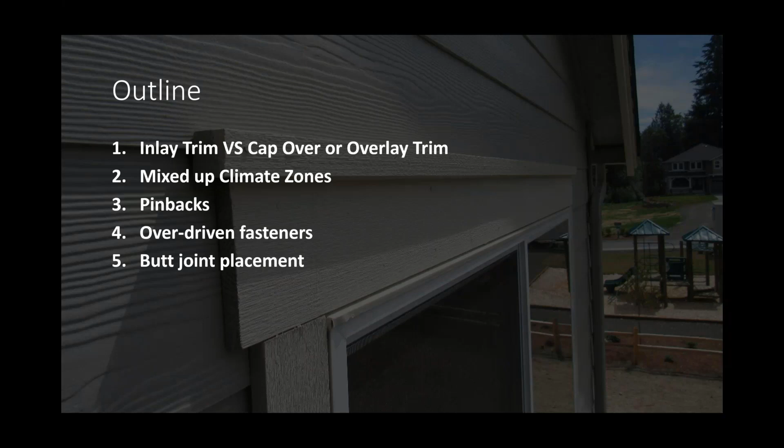Exactly, exactly, and we try to stay within the bounds of what our manufacturing, or what our product scope is, but as we all know, there's interrelated things between flashing and trim and the siding. Yep. So I'm a home inspector. I'm doing a new build here, and if I see Hardie trim done in that older cap over detail, that's flat out wrong, right? They should be doing this detail like we see here today.

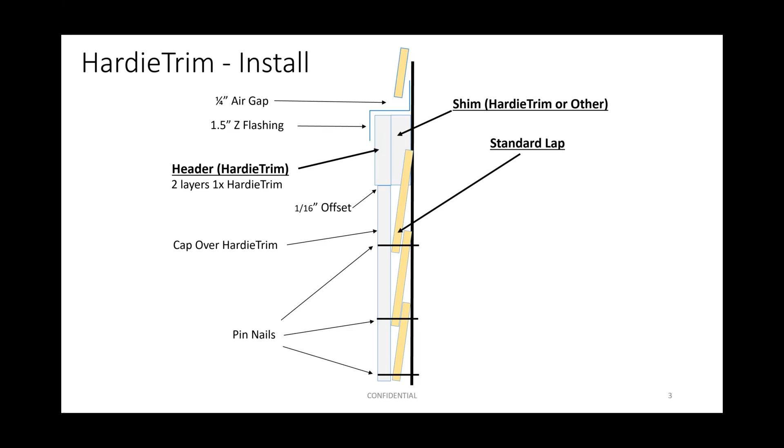Correct. Yeah. And I think the next slide that you have, the one where it kind of shows all three sides, there it is, is pretty telling of how it goes, right? So the header piece again is really a true inlaid butt-to application, and then all the other three sides of this window are cap over, traditionally what you'd find with wood. And so that would be the hybrid, right? We're doing an inlay header, and then the three sides are cap over.

Yep. I suppose an advantage of that is on the edges, you then have a better ability for the siding or the building to expand and contract and not buckle the siding because you could have more of a joint there. Correct. I think what you run into on this is the window manufacturer will call for backer rod and a larger caulking bead between the siding and the window frame, because vinyl windows or fiberglass windows will move more than, say, if you had cladding or Hardie trim or even wood trim there, probably.

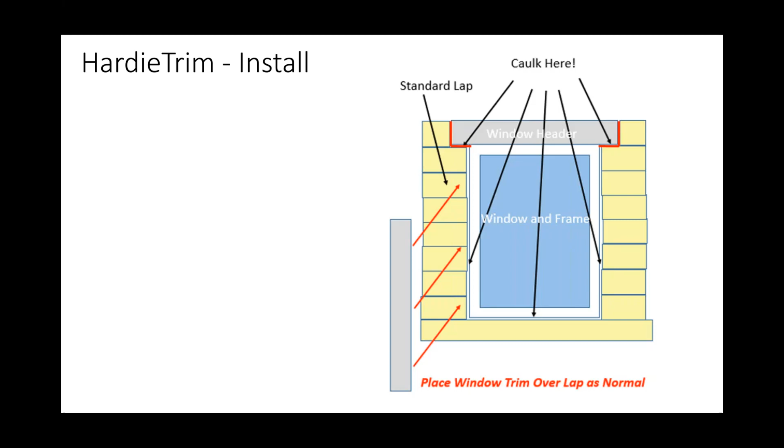Yeah, interesting. Let's go on to your next. So here you can see they've got kind of a mock-up. Now, did you guys test this at Hardie to know that this detail works? Yeah, we absolutely did. We played around with a whole bunch of different options on the back piece of the shim, but what we found was we could use an extra piece, basically what we call fall off, or a waste piece of Hardie as a shim behind the actual header piece, and then that creates that thicker butt-to trim application.

Yeah, that thicker trim. Now from a manufacturing standpoint, this is our thinner product. This is our 4/4 product, and the butt-to application or inlay application typically uses a 5/4 piece of trim. So if you're an installer, you could choose this thinner product and double it up, or you could use the thicker product for the headers and the thinner product for the trimmers.

No, not really. So what we found was the cap over 4/4, like the sides and the bottom, on top of lap is around an inch and a quarter, it fluctuates, right? But it's right about an inch and a quarter thick, and two 4/4, which is 3/4 to us, is an inch and a half. So you do have an offset on that header piece that sticks out a little bit farther than the three sides.

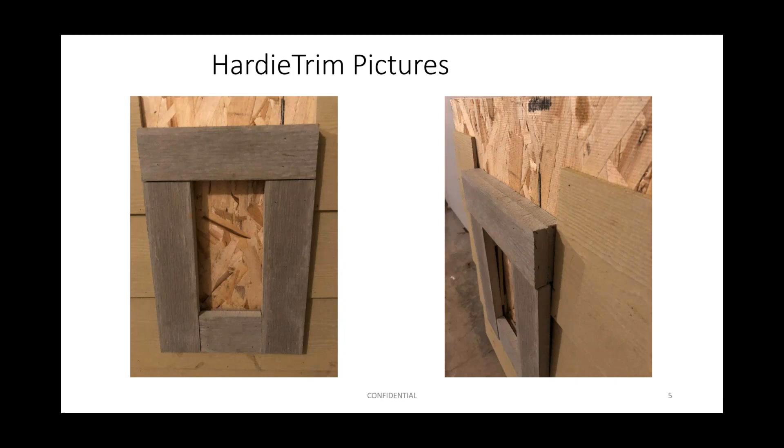So cool. Well, that's interesting. So this is now the detail we should be seeing, and I did include here, and we'll try to post a blog with this, but I do have the code for the flashing, so I think we're all on the same page that that detail doesn't really meet code.

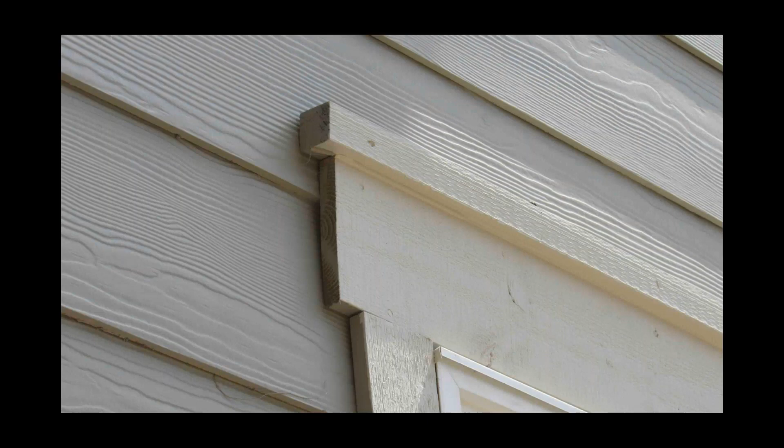And this is a picture from a house that was built, I bet, less than a year ago. So it is sort of interesting to me that builders are building trim details that don't really meet code. But yeah, it's always interesting to me that they actually pass the inspection for the permit. Yeah, that's just a bad detail. It really is.

Water collection system. It is. I mean, you might as well put some fern seeds in there, so you get some ferns growing out of it. It's just a crazy detail. But anyway, I've had a bunch of fights with builders over that in the last couple of years. So I'm really glad to see Hardie at least addressing it within the realm that you can, which is your own products. I appreciate it's hard to pick fights about wood products and things that aren't yours.

Where'd they get that white flashing? Yeah, on the lower part of the window. I don't know. This was one of the big builders. So, yeah, and we talked about this with the warranty, but the Hardie warranty is just for the product itself, so they don't care about the wood trim so much. Still might advise on what best practices are.

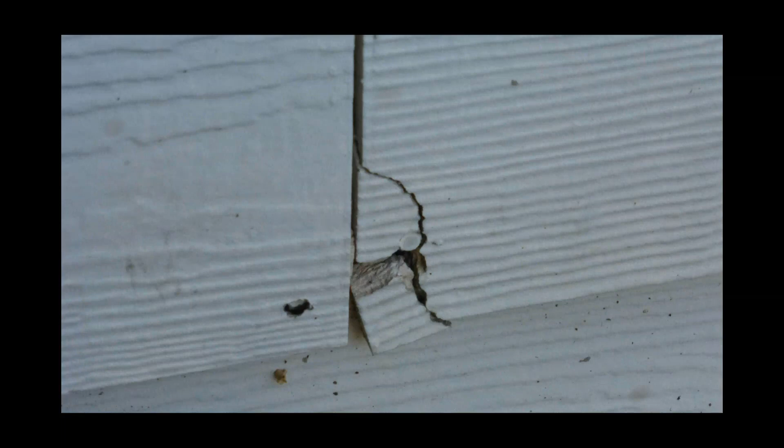So cool. Pinbacks here. Why don't you tell us a little bit about pinbacks, because this is a common thing that comes up a lot. I, for one, saw it over the years. If you get a home inspection call and it's a 2004 build, my question isn't whether I'll find a cracked corner. It's how many cracked corners I will find. And so I was always under the impression that the pin nail was a better pin back detail at the butt joint than the full head nail. But you've got some good info on this, Troy. Why don't you tell us about it?

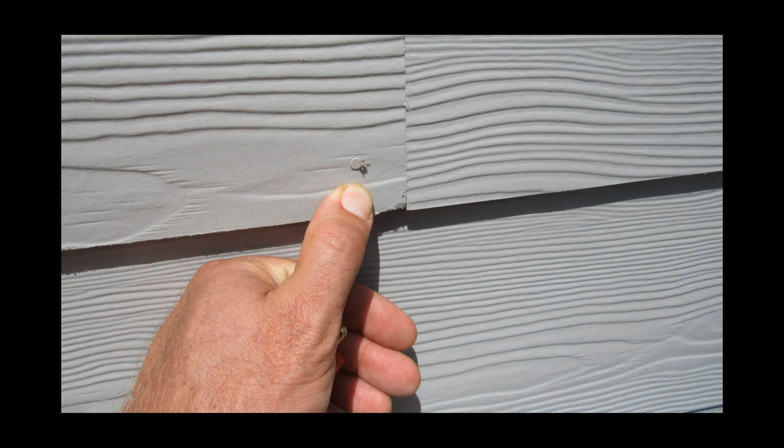Yeah. So the pinbacks are a better detail on that. The way Hardie reads pinbacks at butt joints is aesthetics only. So the only reason an installer, a builder, a contractor would pin it back would be for aesthetics. Like they see that course at that butt joint, one plank is kind of popped up a little bit, and it's following the framing, right? It's not really an issue with the water envelope.

But what we encourage is a finish nail, 15 to 18 gauge finish nail, like what you see here on this slide, to pin it back. And the reason why we like a finish nail is because as the house moves, expands, and contracts through the seasons, it will pull through the siding, and it kind of moves back and forth in that siding until eventually it pulls through, and then it just sits there.

So that's what we prefer, because our product is dimensionally stable. It's not really going to move. It doesn't expand and contract like wood in the heat or in the cold. So it will stay fairly stable. And as the house moves, the wood behind it will push it forward and out.

Now, Dylan, you brought up a good point with the headed nails from 2004. Our guidance used to be, yes, you can use a headed nail as long as it was off stud. At minimum, you have to be 3/4 of an inch from the end of the plank, and up an inch from the bottom. So you're not hitting a stud, basically.

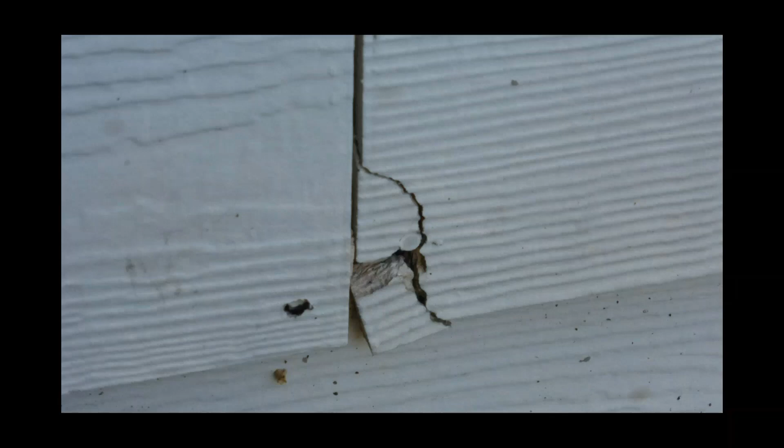What would be the forces that would make it want to pull through? The house moving, and the siding not moving at the same rate, right? We say a house basically breathes. It breathes with the seasons, so it expands sometimes in the heat, but typically it expands mostly when it's moist outside and moisture gets into the wood, and then it moves everything, and the siding stays fairly stable, and then it breaks, it cracks.

This is actually a pretty cool picture because you can almost see the nail and the caulking all held together, and it's like the other side of the board got pulled away. Yeah, that is a really good picture because if you look on the left side of that line, you can see where the head was imprinting.

Onto the piece that's on the plank, and then the broken piece is where it stuck to. Yeah. That seems like an exceptional amount of movement, though, for as dimensionally stable as Hardie is. Well, Hardie's not moving; it's the building moving, right? Yep. The OSB and the wood framing and stuff. Yeah, we expect that our product in a 12-foot board will move less than an eighth inch for the entire board of a 12. And that's still quite a bit, but in this picture, that's 3/4 of an inch. So it's an eighth of an inch and 3/4 of an inch right there. Hmm.

Interesting. Cool. Well, pinbacks. So to summarize pinbacks, basically this detail's okay. You can have a full head nail as long as it's not into the stud, at least 3/4 of an inch off the butt joint. So you can have a full head for a pinback, but the little pins are also an appropriate pinback, almost a preferred pinback, where butt joints might be flaring a little bit. Does that sound accurate? That is absolutely accurate. Cool. We'll keep moving here.

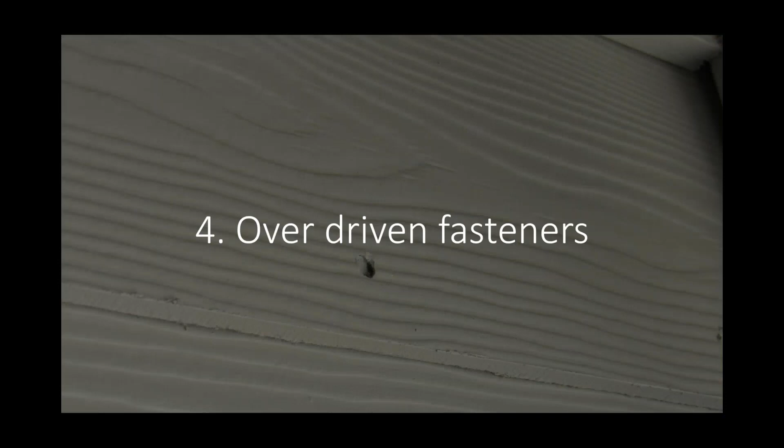It's pretty loose. You need a bigger claw hammer, Dylan. Yeah, that pry bar that I left in the car.

So there's a cool picture, an overdriven one right there. That's a great picture. But it's also too low, right? That's right. Or the siding doesn't lap enough, one of the two. Yeah, so it's exposed. Overdriven and exposed. So there you'd try to check underneath and see if you can see another fastener nearby, because that one doesn't even count, right? Yeah, exactly. So when I look at something like this, I actually don't worry about something that we call shiners.

We don't really worry about shiners so much, because I worry more that it's overdriven, not that I can see it. Because I know that anything that's face nailed, not blind nailed, if you were to face nail our product, you actually get 20 miles an hour more holding power on average than a blind nail application. So it actually helps hold it, as long as it's not overdriven.

Hey Troy, I got a funny story for you. This was in New England, so it's going to be zone... Five, is it zone five? Five, I think. Yeah. And my nephew got permission from Hardie to face nail everything. Oh. Well, because they wanted it to look like the old look where everything was face nailed, trying to knock off the lap siding. Yeah, that's cool. And was it blind nailed also, or just face nailed? No, just face nailed.

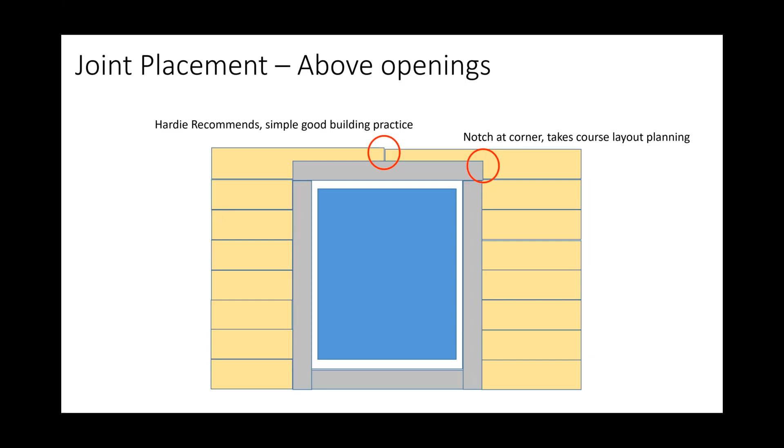Well, and good data. I think what I hear from Troy is he's getting phone calls about this, that home inspectors are calling this stuff out. So we're just trying to clear the air here that this is maybe not the best detail, but it is allowed, and it's allowed in both climate zones. Am I correct? Correct. Yeah, and actually that's a good point, Dylan. So really, from a home inspector point of view, it's something to call out for your homeowner because it is something that they have to watch, right? But again, it's not a requirement for Hardie. So it would just be, hey, this is probably not the best building practice.

Yeah. In my own experience, in my templates and library that I use, I have a bunch of nuanced language for things that aren't really installed the way we recommend doing it today. And some of them I'm jumping up and down saying this is really a problem. And others I point out that there's better ways to do it, but it's probably not worth fixing other than monitoring it. And maybe you keep things up with caulking and stuff. Exactly. Not ideal, but it's tough as inspectors. We can't re-engineer the house.

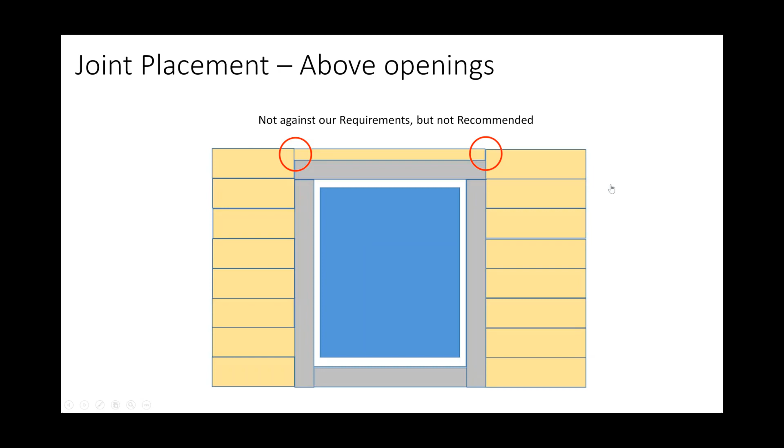No, exactly. So I am now going to take the risky technological leap of trying to escape out of this. Just right click and open it in a new tab. Let's see. Yeah. We get to see your password now. No. I know. Yeah, that's right. Is this what you did, Charlie? Yeah. Okay, it looks cool.

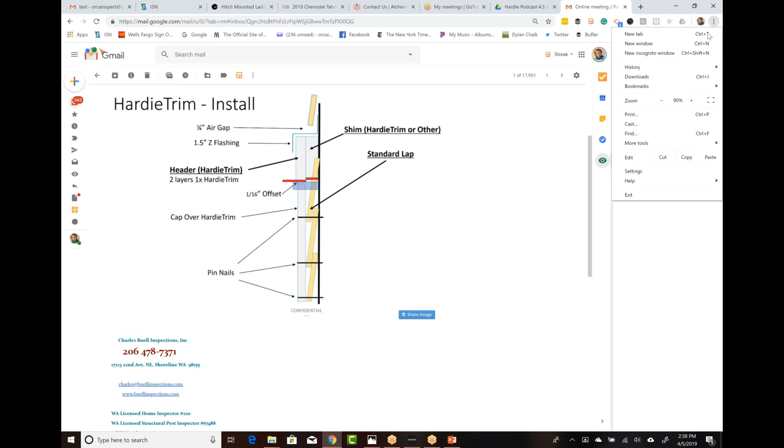So I just wanted to see, well, obviously you have that 1/4 inch gap over the window on the left, but maybe that shim should step up so that any siding could go up behind the outer board. I got you. Now I understand what you're saying. Yeah, actually, funny thing is that we don't really even require it; the only reason the shim is there is to allow production installers to move quicker, right? So it could just be little slats or something. Correct. It could be anything, right?

Yeah. Again, we assume that it's going to fall off, and the reason why we say HardieTrim or other is because from a production build standpoint, these installers are all piece rates, by the way, so they're trying to go as fast as they can but meet the quality that they're supposed to. So we wanted to make it as easy as possible for someone installing on a piece rate system. That'd be a good place for whitewood. Yeah, well, the whole idea is we're assuming that hopefully there's no whitewood to put back there. So at some point they're just using Hardie trim, but that's wishful thinking.

Yeah, cool. But my point is, you've got a drawing way back where it shows the head trim going way past the vertical side trim, and I thought that if it had that overlapping gap, the siding essentially would be lapped by the front trim board. Yeah, I get it.

Cool, guys. Well, that was a great conversation. I appreciate everybody taking the time. Hopefully, this clears the air on a handful of call outs that home inspectors are commonly making, that the siding may actually indeed be installed correctly. And hopefully, we all learned a little bit about fiber cement siding.